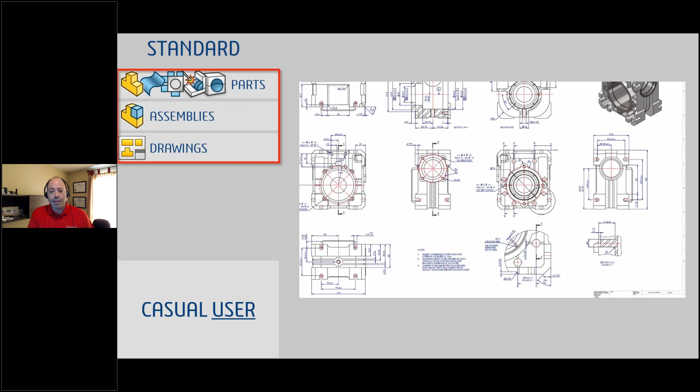So let's start with SOLIDWORKS Standard. All of you are using SOLIDWORKS Standard to some degree. In that you'll find the casual drafting tools - tools for part design, assembly design, drawings. It also includes surfacing, sheet metal, weldments, and even some mold tools. So all of those are included inside SOLIDWORKS Standard.

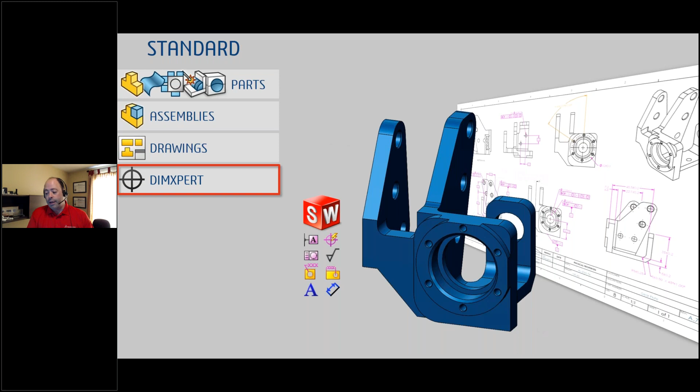But what else? One other thing is that we have DimXpert. DimXpert is the first step into model-based definition, which is the ability to, instead of creating 2D drawings and annotating a 2D drawing, use the tools inside SOLIDWORKS DimXpert to annotate the 3D model. Eventually, you might even get rid of the need for a 2D drawing. Most importantly, this streamlines downstream applications like manufacturing, CAM, inspection, etc. That's included inside SOLIDWORKS Standard.

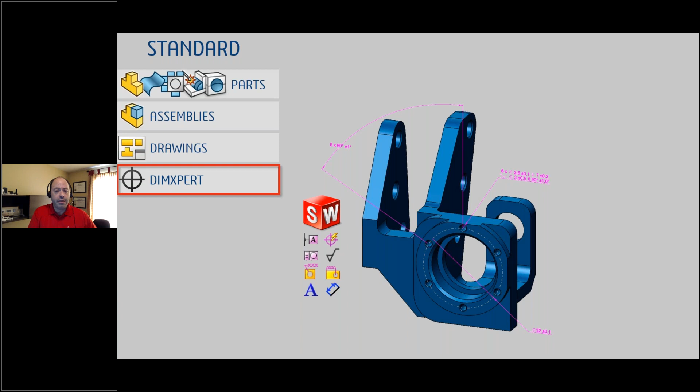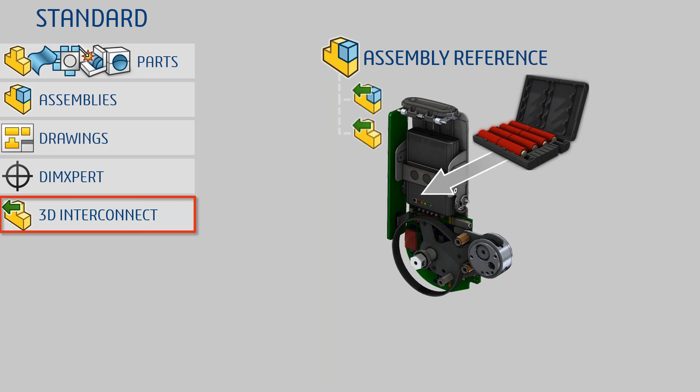We also have inside SOLIDWORKS Standard 3D Interconnect. 3D Interconnect allows us to import data from third-party systems - for example, Pro-E files, Inventor files, Solid Edge files - and import them directly inside your SOLIDWORKS assembly without the need of translating the files.

Now, what's kind of neat about 3D Interconnect is that when you insert something from a third-party system, like the examples I mentioned before, they keep a link or a reference to the native file.

So if, for example, that battery pack assembly was designed in Inventor, originally it had 8 small batteries, but in Inventor I did a change and updated that pack to be more powerful and to have maybe 6 large batteries. Well, inside of SOLIDWORKS, I don't need to redo everything. I can simply update the changes inside of SOLIDWORKS. So a very good tool to use.

And if you want to learn more about 3D Interconnect, we did a whole session. It's hosted on our channel, and I'll give you the link to look it up after the session. If you're interested and you want to learn more about 3D Interconnect, how it works, you can certainly give our video a look.

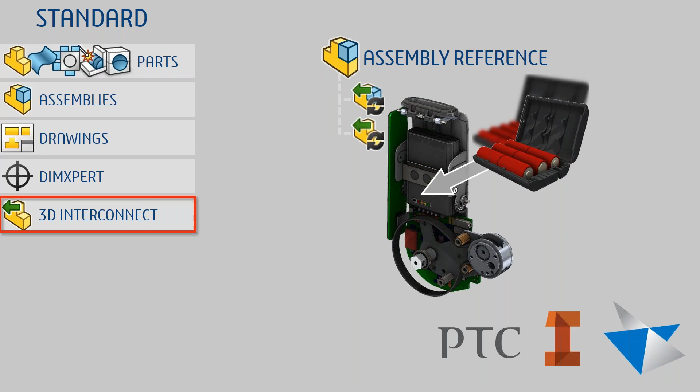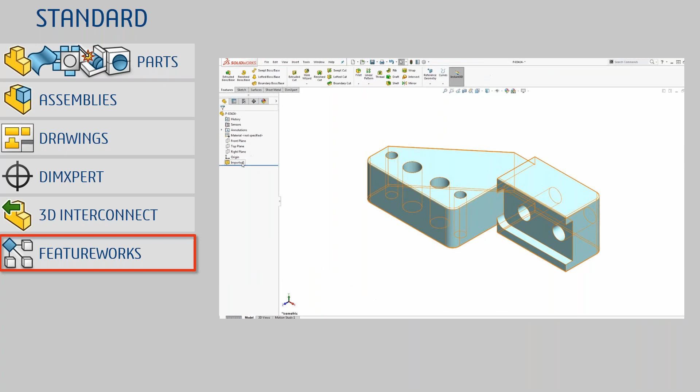Now, another tool that is included inside of SOLIDWORKS Standard, and that's actually something that used to be in SOLIDWORKS Professional, is FeatureWorks. FeatureWorks allows us to import a step file, for example, a neutral 3D file, and basically rebuild the feature tree so it becomes fully editable inside of SOLIDWORKS.

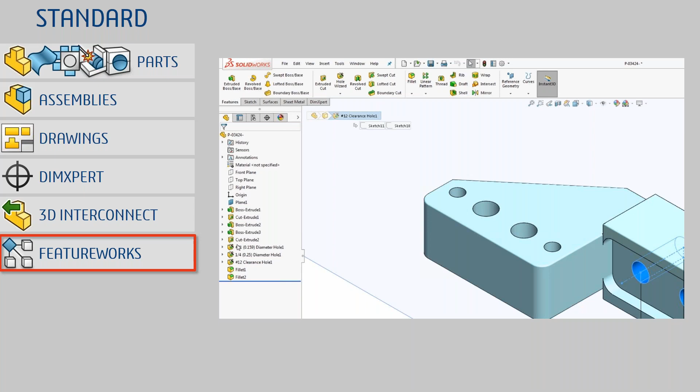See, that's an imported solid. I use my recognize feature and it actually reverse engineers all the features inside of this part. So now it's more or less a native SOLIDWORKS part with all the features that I can easily edit and change. And again, that's something that used to be in SOLIDWORKS Professional, has now fallen down to SOLIDWORKS Standard to give more access to all of our users.

So if we do a quick recap of what's inside of SOLIDWORKS Standard, and like I said, there's a lot of stuff in each of those products, and I won't have time to talk about everything. But inside of SOLIDWORKS Standard, you've got the native tools to do parts, assembly, drawings. DimXpert is going to be in there. 3D Interconnect, FeatureWorks is in there as well.

Now let's move along. Oh, actually, there's a couple more things also. All the Express products are also included in SOLIDWORKS Standard, so Simulation Express, Flow Express. We introduced the ability to import and edit mesh files a couple of releases ago, so that's inside of SOLIDWORKS Standard. We have FeatureWorks, I mentioned that. We also have utilities that, again, used to be in SOLIDWORKS Professional, now included inside of SOLIDWORKS Standard.

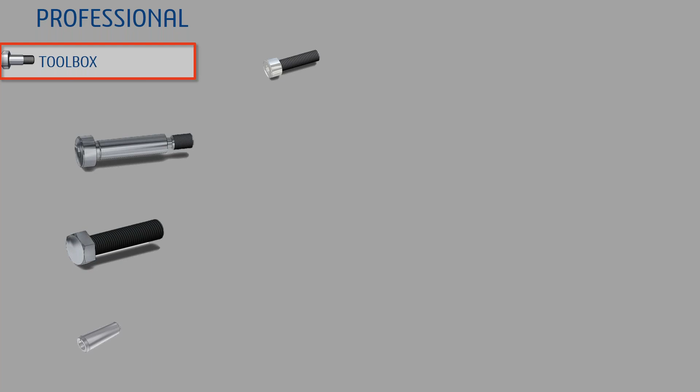So now let's move to SOLIDWORKS Professional and highlight some of the tools inside of it. Now, probably the one tool that people use most often, and the biggest reason to get SOLIDWORKS Professional, is for the toolbox. The toolbox is a library of over 1 million components that is readily available.

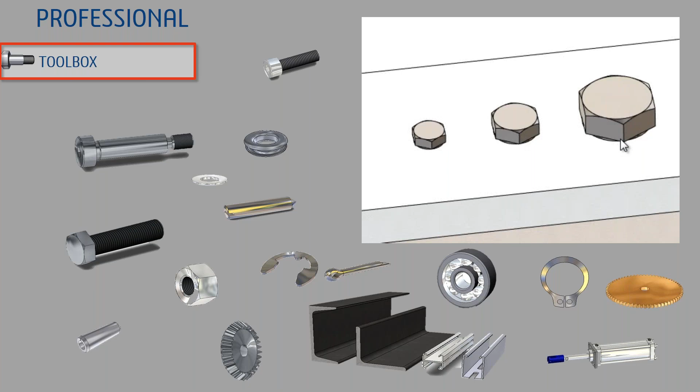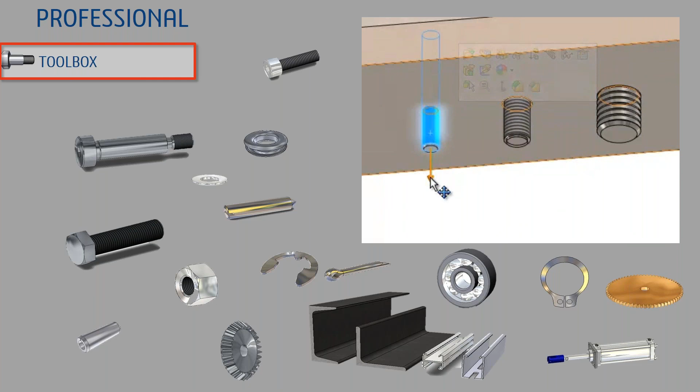It's a simple drag and drop. You pull it into your SOLIDWORKS assembly, it sizes automatically. It can understand the hole diameter and size automatically. If you want to change the length of something, you pull it, and it goes to the next standard length of component.

And you're going to have inside of toolbox bolts, nuts, washers, bearings, gears, snap rings, and all the lot. So like I said, over 1 million components inside of toolbox. If you do any machine design, that's probably a given right there, something you probably use day in and day out.

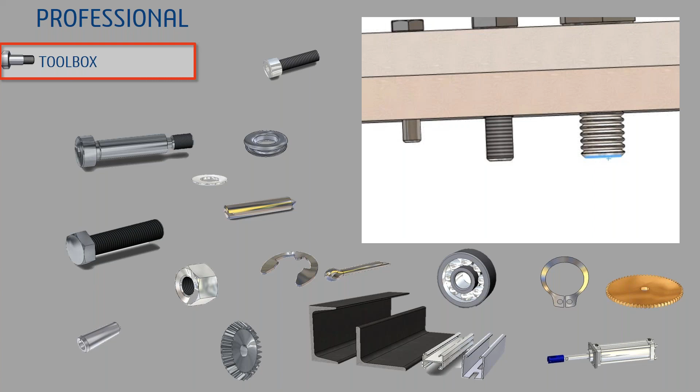Additionally to that, inside of SOLIDWORKS Professional, we also have photo rendering tools. So there's actually two. One is PhotoView 360 that runs embedded inside of your SOLIDWORKS assembly to do quick renderings, allowing you to do some of these renderings as you're designing just to give you an idea of how this is going to look.

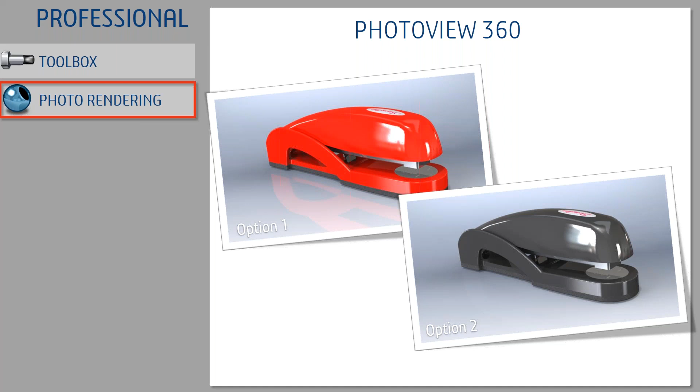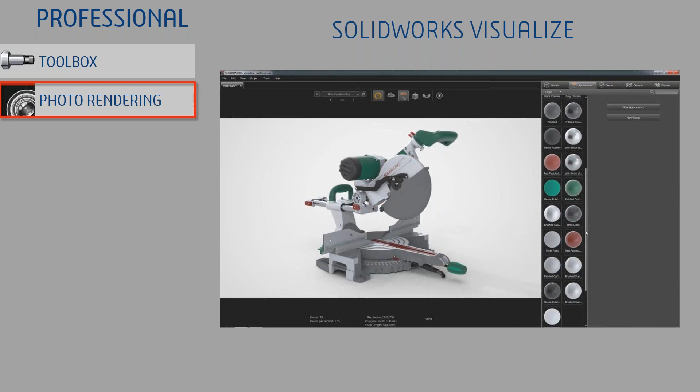But a couple of releases ago, we also introduced, as part of SOLIDWORKS Professional's maintenance or subscription service, another tool called SOLIDWORKS Visualize. Now this is a bit different because yes, you're going to start inside of SOLIDWORKS with your model, but then you can take that model to a standalone application. So Visualize is a standalone application. You can actually have this application installed on someone else's computer, like someone in marketing or in sales, and now they can leverage your SOLIDWORKS models.

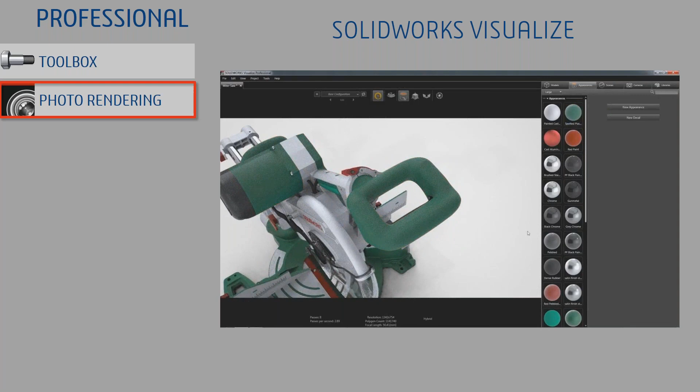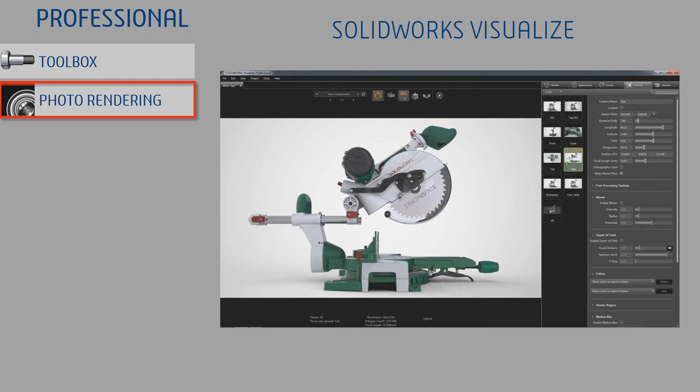And basically paint the design like they want. There's thousands of materials available, some installed, some available to download, and the quality is just so good inside of SOLIDWORKS Visualize. You've got control over all those materials properties, roughness, bump, and whatnot. You can create all those camera angles or camera views, options to set a focal distance and depth of field. And one of the nice things about Visualize is that it renders as you're making the changes.

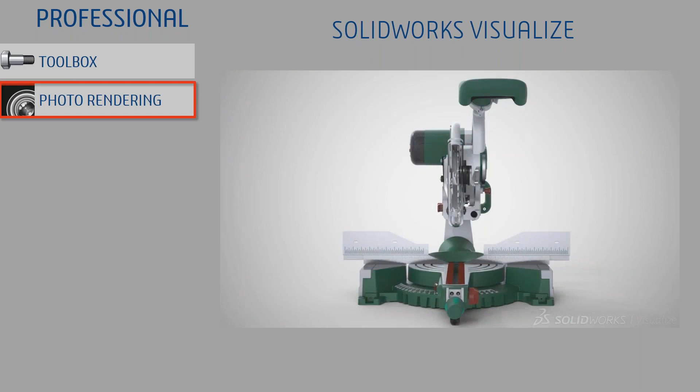And just to give you a highlight of some of the quality rendering you can get with SOLIDWORKS Visualize, here's a couple of finished pictures. And those are not actually pictures, they're actual renderings out of SOLIDWORKS Visualize, just to give you an idea of the quality you can get out of it.

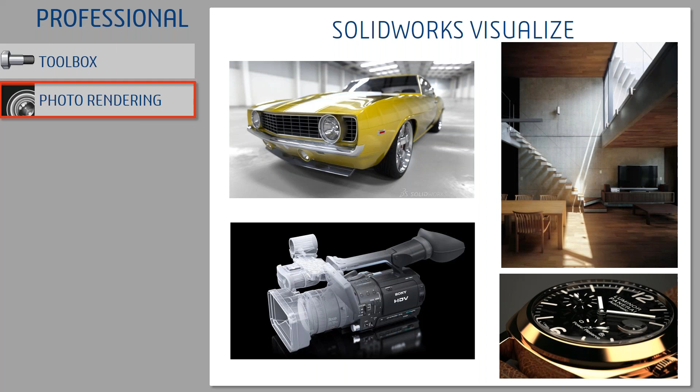It's really magazine quality renderings. Another tool we have inside of SOLIDWORKS Professional is SOLIDWORKS Costing for Part. SOLIDWORKS Costing allows you to evaluate the manufacturing cost of a part.

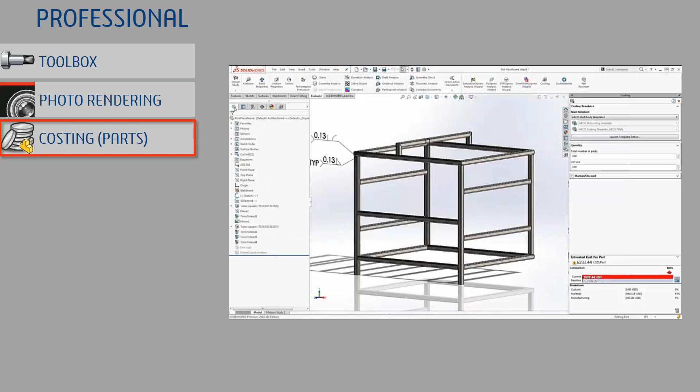As I'm running costing, you see on the bottom right the actual cost to manufacture this frame. What's neat about SOLIDWORKS Costing is that it evaluates the cost of the material, labor, and can add pretty much any manufacturing operation, even paint and things like that. What's also great is that this is based on your model.

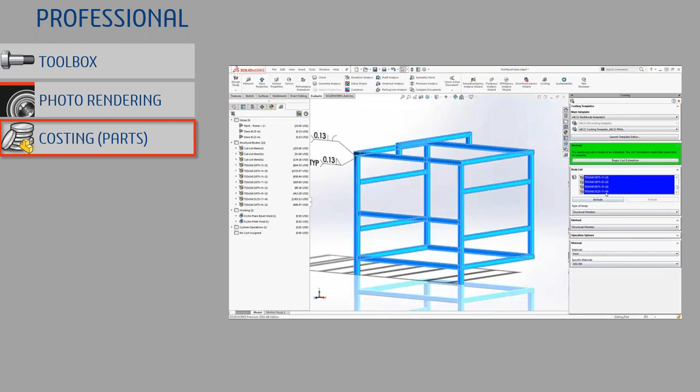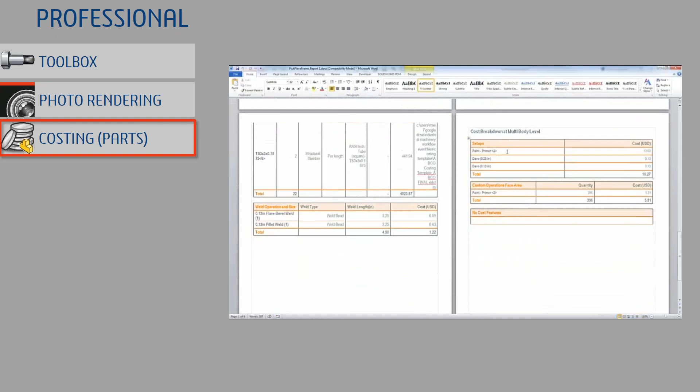So if I make a change and say, hey, I think I can get this cost down a little if I change my weldment profiles, maybe something a little cheaper with a thinner wall, it won't affect the overall design. But because the profiles are cheaper to purchase, you can actually see those changes, create a report, and see if those changes drive the cost up or down. A really useful tool, and that's part of SOLIDWORKS Professional.

Another tool we have inside of SOLIDWORKS Professional is the Task Scheduler. The Task Scheduler is basically a robot - you let this tool do what you don't like doing on your own. For example, if you change your SOLIDWORKS version and need to convert files to the latest release, you can let the Task Scheduler run overnight to do that.

If you made changes to an assembly and a number of parts, and don't want to open the drawings one by one just to update the views and update your drawing, you can let the Task Scheduler do it for you. It's also useful for printing - you can batch print a whole directory or folder of drawing files, and it's also useful for importing or exporting files.

Something I see quite often is a project is done and I need to create either DWG files or PDF files of all my drawings. Obviously you don't want to do that manually, one drawing at a time. You just set the Task Scheduler to do it at 4 or 5 o'clock in the afternoon and let it run overnight, and it will do all of that for you. You can also use it to update properties.

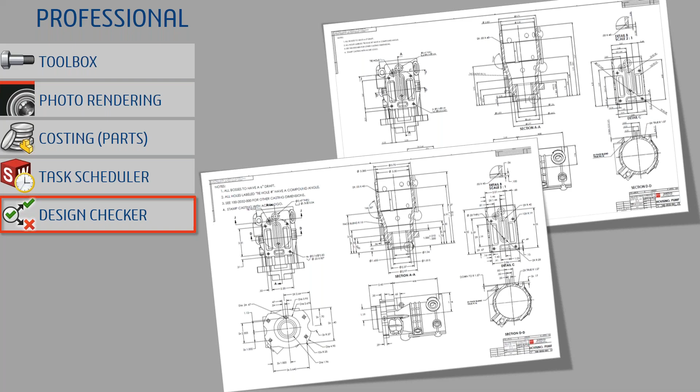We also have inside of SOLIDWORKS Professional a tool called the Design Checker. The idea with the Design Checker is to look for any discrepancies with regards to your company's standards on a drawing. So how you set it up is that you start with a good drawing that has been checked, that has all the arrow types, the font, the layer - everything set correctly - and you build a checklist off of that drawing.

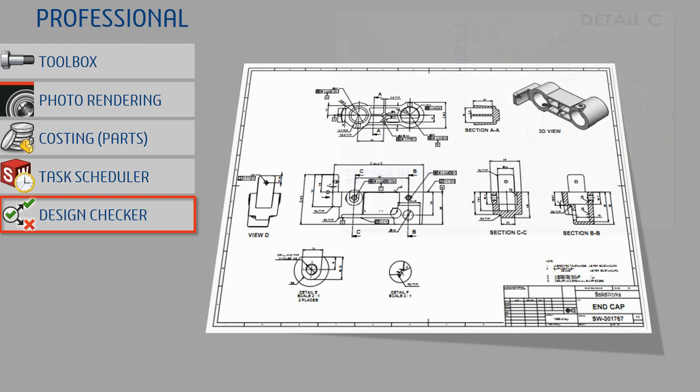Then when you need to run it against another drawing, you simply let the Design Checker highlight everything that is out of your company standard. For example, here we've got an example where you see different types of arrowheads, different types of fonts. Some of the writing is vertical, other is horizontal. There's even some writing that's in bold. So there's a lot of discrepancies that go against the company standard.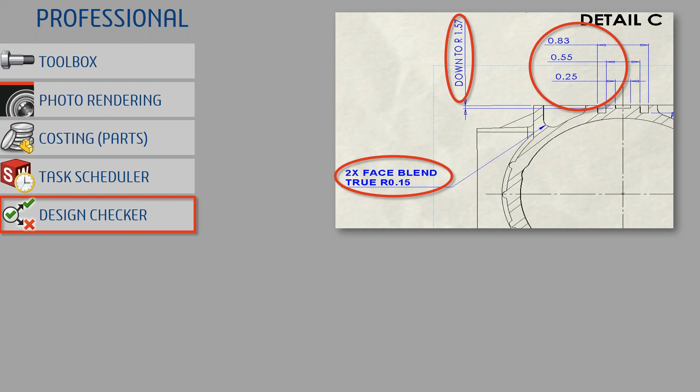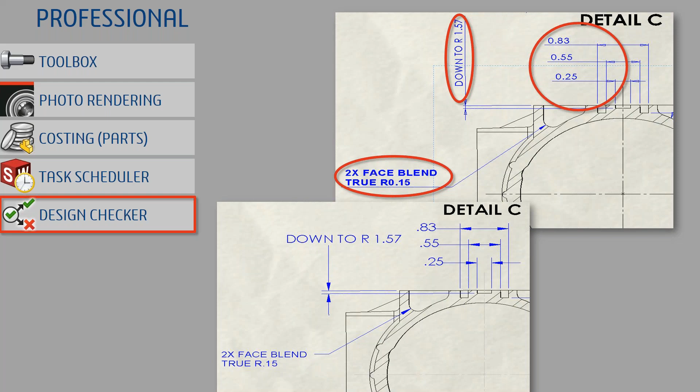So I run the Design Checker, and it will actually highlight or give me a report of all those checks that are going against my company standard, and I can even let the Design Checker fix it on its own. There are over 50 checks it does, and it even has a spell check embedded within it - a really useful tool to do checks on multiple drawings before they get released for manufacturing.

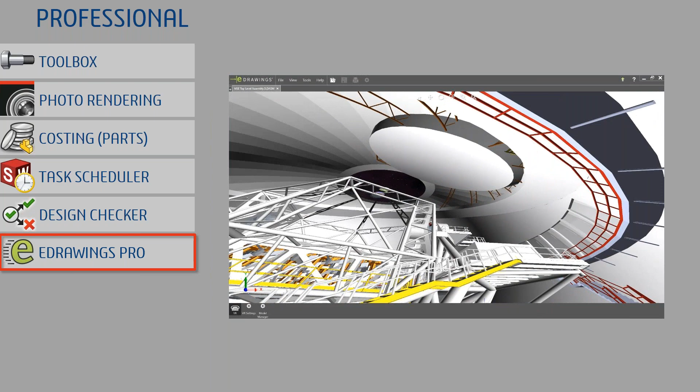Also in SOLIDWORKS Professional, we have eDrawings Professional. In 2019, we actually have VR and AR capabilities built inside eDrawings. So if you want to get into a virtual reality environment setup like this one here, or augmented reality, this is now available directly inside of eDrawings Professional. You don't need to process the files into another system just to get into that AR/VR environment - now you can actually do that directly with eDrawings Professional.

As a side note, in 2019 all the features that used to be in eDrawings Professional up to 2018, like annotation, measuring, and whatnot, are now all part of eDrawings Free. So eDrawings Professional now has those added capabilities, but what used to be in eDrawings Professional up to 2018 is now, in 2019, in the free eDrawings version.

So again, if we do a quick recap of the tools inside of SOLIDWORKS Professional, I don't have time to cover everything, but here's what we talked about. So we do have document management. I didn't talk about it, but we do have a PDM standard that comes with SOLIDWORKS Professional that's available. We mentioned eDrawings Professional, toolbox, rendering, costing.

There's also a tool called CircuitWorks. That tool allows you to import a PCB data file and convert it into a SOLIDWORKS model, a 3D model. So if you want to have a sense of space, get the PCB board into a component and design around that, you can use CircuitWorks to do that.

We talked about the task scheduler. There's also TolAnalyst. Again, the two last ones, TolAnalyst and Scan to 3D, used to be tools that were only available in SOLIDWORKS Premium a couple of releases ago. Now they're inside SOLIDWORKS Professional. TolAnalyst will allow you to do tolerance stack-up analysis on assemblies, and Scan to 3D will help you import point cloud data and mesh files to do reverse engineering or any other type of work with those types of files. So again, a good overview of what we have inside SOLIDWORKS Professional.

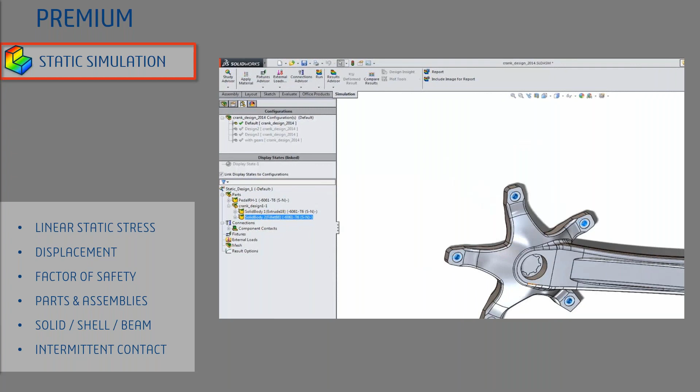Using static simulation, you set your loads, you basically set up your problem as if it were in real life, apply loads, and then understand how your design is going to react under these loads. You get the stresses, you get displacements, you can get factor of safety. This will work on parts and assemblies, and it will also work on different types of parts, whether it's a solid, a sheet metal part, or a weldment. This works really well, and you also have the ability to set up different types of contacts between parts. So that's really the first level of FEA included inside SOLIDWORKS Premium.

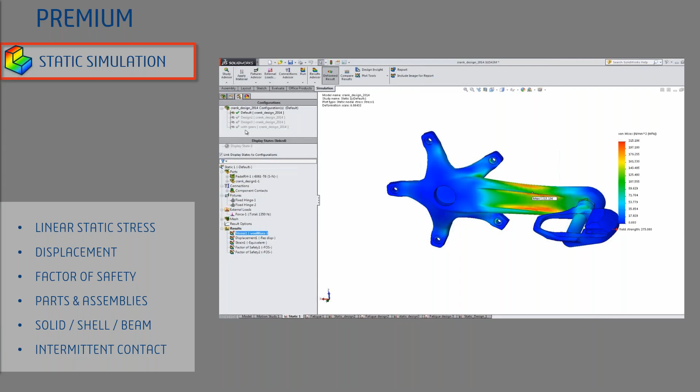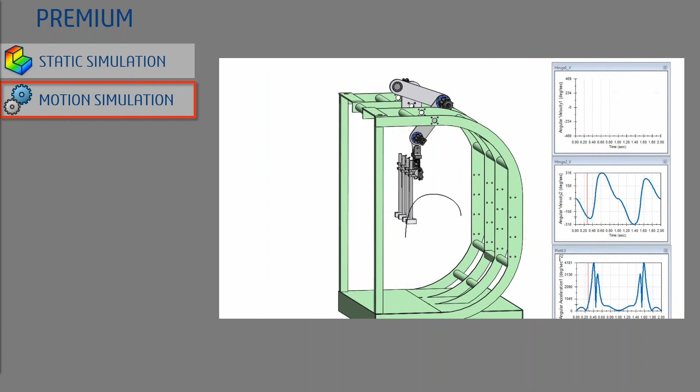Next, we also get motion simulation. With motion simulation, it's not just about animating, it's also about getting actual outputs from that motion study. For example, I want to understand the size of a motor I need for a certain mechanism to work—how big of an actuator, how big of a motor, what's my power consumption, what are my loads, distributed loads, the forces applied to my different joints because of that motion, and so on. So this is part of SOLIDWORKS Premium that's available inside SOLIDWORKS Premium.

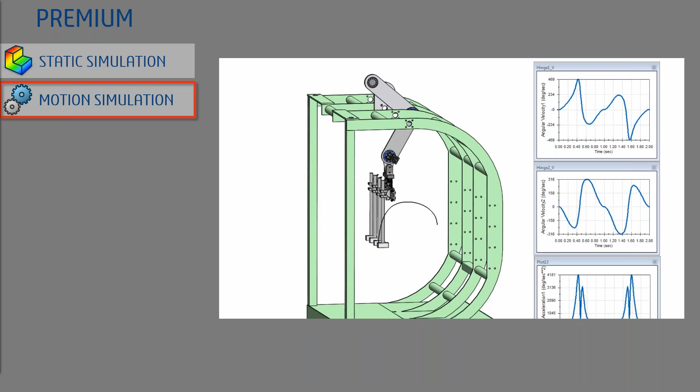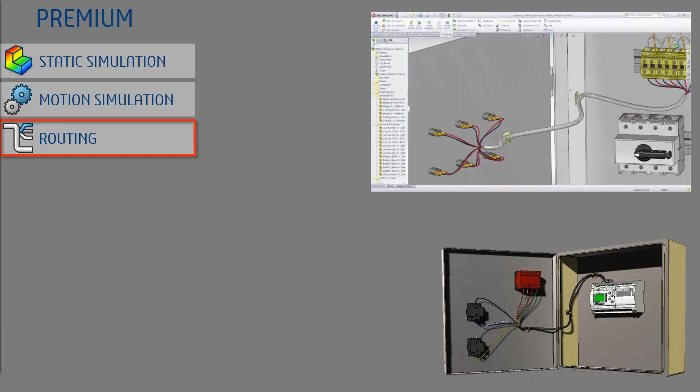Inside of SOLIDWORKS Premium, we get into routing. Routing can actually do different types of routes. The example we're seeing here is with cables or wires. In this panel, an electrical panel, I'm wiring some cables from my different components, so as you can see, it can do wiring cable harnesses.

What's neat about routing is it can actually do a lot more than electrical wires and cables. You can use routing to do mechanical piping. You can also use the routing module to do tubing, either rigid or flexible, think hydraulic lines, pneumatic hoses, or hydraulic hoses. This can all be done inside of SOLIDWORKS Premium using the routing module.

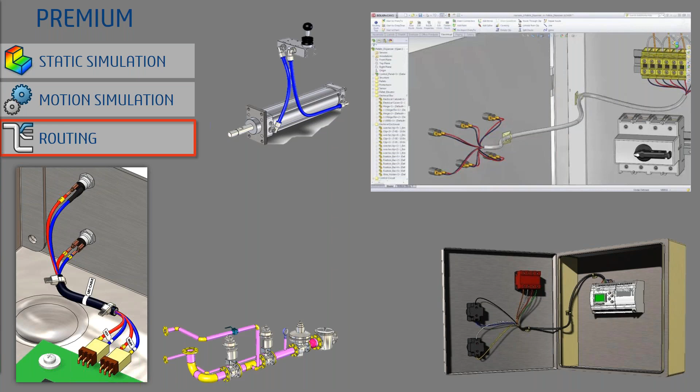But routing doesn't end there. It can actually support non-cylindrical profiles. Think about ventilation systems, where we often have rectangular profiles, so we can use routing for that. Another example is designing cable trays using those profiles. That's all available inside of SOLIDWORKS Premium with the routing module.

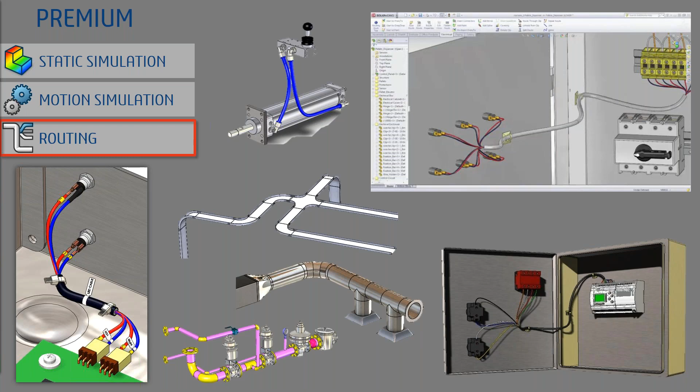Another example of functionality only found in SOLIDWORKS Premium is the ability to flatten a surface. In this example, I need to get a 2D layout of a sticker that I want to apply on this part. As you can see, it's actually a curved part, and it's curved in two different axes.

It's hard to see on the screen here, but with the flatten surface command inside of SOLIDWORKS Premium, I can actually select that surface or surfaces, it can be multiple surfaces, and save that flattened surface into a DXF or DWG for manufacturing or cutting. Now it doesn't just end there either.

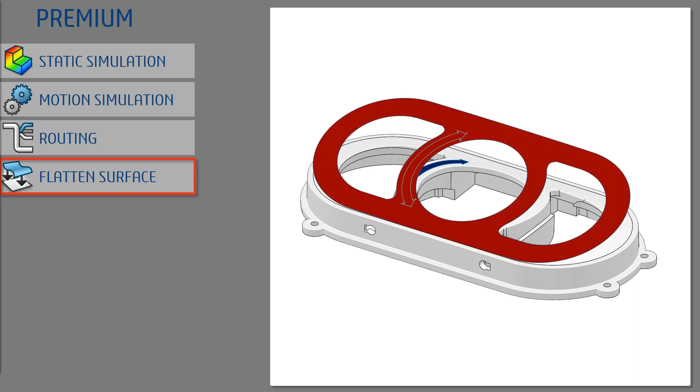Because there are some meshing tools required for the flattening surface, we can actually create a representation of the stretching and compression when we flatten this surface out. So in the case of a sticker, if you try to put it on something round, you'll see it's going to compress in some areas and maybe stretch in others. We can clearly see that on a color-coded chart.

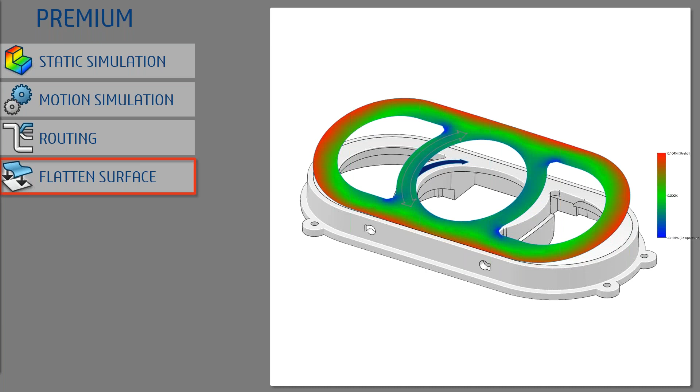And even more, we can actually put in some relief cuts and see the effects of those relief cuts. As you can see, before the relief cut, I got a lot of stretching around the outside edges. I use the relief cut option inside the flatten surface command, and now I get a much better sticker, and it's not going to get bad results when I put it on my curved surface. So really useful for textile material. Here's an example with stickers, but that's part of SOLIDWORKS Premium.

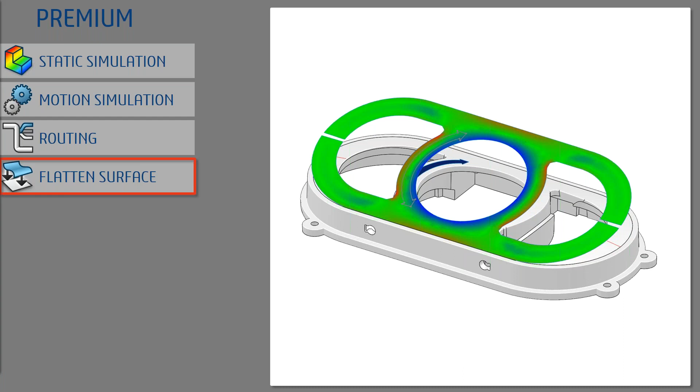Also part of SOLIDWORKS Premium is the ability to import CATIA files, CATIA V5 parts and assemblies, or CAT product and CAT part, and import those inside of SOLIDWORKS. So if you have to deal with CATIA files and need to import them into SOLIDWORKS, you're going to find the ability to do that with SOLIDWORKS Premium.

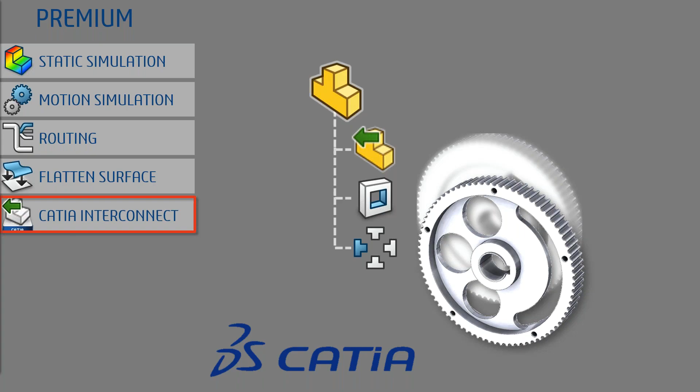So let's get back to a quick overview of what we talked about inside of SOLIDWORKS Premium. We have static simulation to do stress and displacement on parts and assemblies. We have motion simulation. We have the routing module to do electrical, wiring, tubing, piping, and other types of routing profiles. The flatten surface command is in SOLIDWORKS Premium as well.

Along with something I didn't show but will mention, costing for assemblies. We talked a little about costing in Professional for parts only; inside of Premium, you can do the roll-up for the whole assembly, including purchased parts and things like that. We talked about CATIA interconnect, the ability to import CATIA files inside of SOLIDWORKS Premium. But also inside of SOLIDWORKS Premium, we have sustainability, which allows you to do analysis on the environmental impact of a design, the carbon emitted based on where it's used, where it's manufactured, transport, material, and so on. So really, a green evaluation of your design.

So let's actually do our last poll of the day. Same question as before: if you're a premium user, what tool do you use most often? If you're not a premium user, what tool would you like to be using? The poll is out, so you can start responding. You can also select multiple options, so if you're using many of those tools, just check off what you're using.